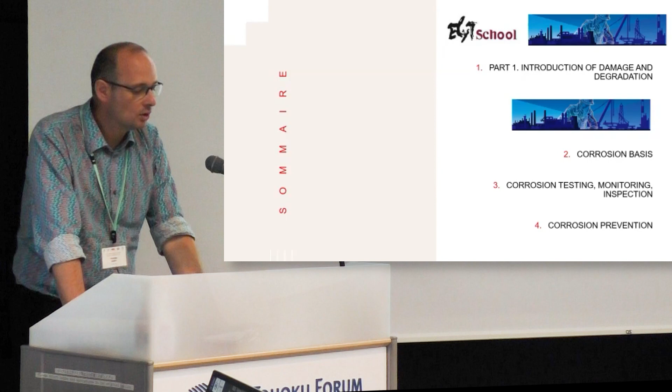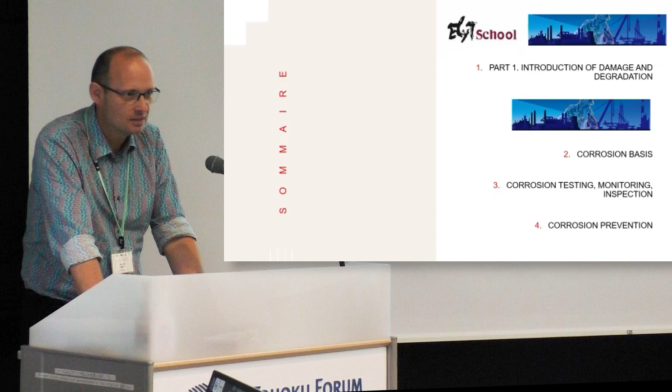My talk is divided into three parts, subdivided into four actually. I'll make a brief introduction of damage and degradation, and since I work mostly in corrosion, we'll talk about corrosion. Maybe some students from INSA Lyon already know about corrosion, so I should ask a lot of questions because I know their teacher very well.

Let's have a look at the introduction of damage and degradations. If I ask you what is corrosion, usually what you're thinking is chains, boats, pipes, garden entrances, and sometimes reinforced bars in concrete. Often when you talk about corrosion with friends who are not specialist scientists, they have the solution: you can paint, and that's it.

So corrosion is not only painting when you see rust. It is also understanding how it will degrade, trying to solve the degradation, and trying to mitigate the degradation. That's the goal of the other talks I will give during this intensive course.

Just to note, the last picture was taken two days before in Matsushima. You see guys taking a picture of boats, and I'm always looking for corrosion pieces.

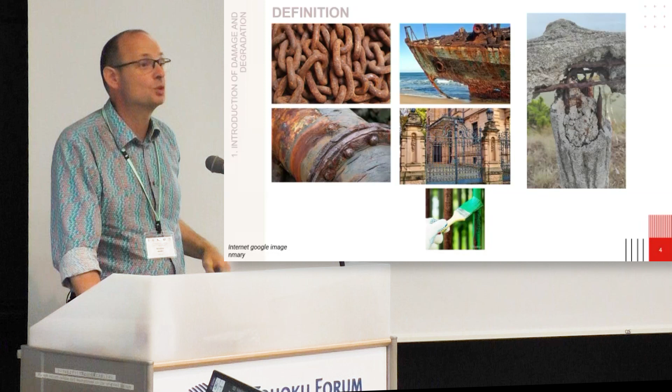Just before, Professor Uchimoto asked you what is risk management, what is risk, and what is safety. I could do exactly the same, asking what is corrosion. If you look at corrosion, you will find a lot of definitions, some from standards, others proposed by guys. But if you read carefully, you will find common words.

The first one is related to damage. It can be deterioration, degradation, destruction, attack. So you are losing matter.

The second word you will always find is environment. That means the material itself is safe, but against environment it will change. And the second point is: if you have the material and the environment, but they are not connected together, you will have nothing. So you need interaction.

So usually what we call corrosion is the definition given here: it is basically the result of interaction between materials and their environment. Consequently, what you get is material loss. It can be loss of properties - mechanical, physical, chemical. And all this loss of properties will finally lead to failure.

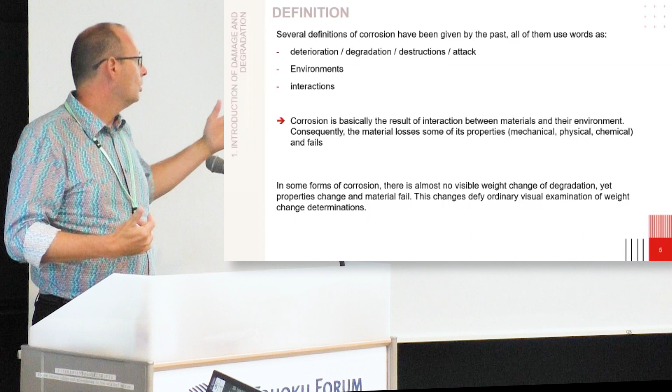Hydrogen. Hydrogen is a small atom. It will diffuse, but it will change a lot the mechanical properties of the material without changing the general shape. So in this case, only by visualization of the piece, you will not be able to see that there is rust and think we should paint. No - we have to find new technologies to detect these degradations, or this effect of environmental action on the material.

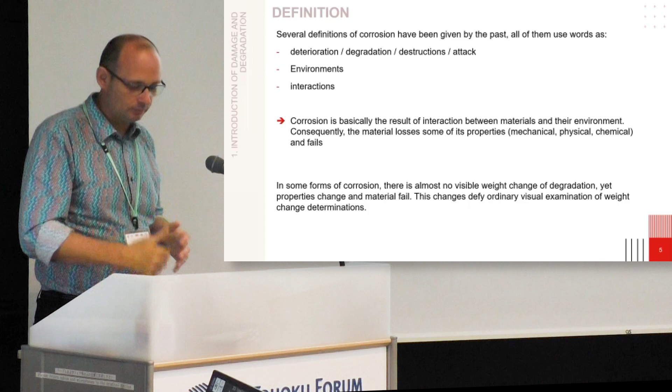Corrosion is also a natural process. It's a kind of cycle of life of your material. So in industry, you start by extracting oxides and ores from the earth.

From this mining, you apply metallurgical processing, so you create metals. From metals, you create infrastructures - this can be a plane, it can be whatever you want. But if you think about the thermodynamical cycle, oxides and ores were stable, so the energy was minimal.

By extracting and shaping the materials, you change the energy. So what does the system want to do? Minimize its energy again. One way is corrosion - there are other ways, but for now I'll focus my talk on corrosion. So you minimize your energy through degradation, and what you get when you corrode materials is oxides, and the cycle is closed.

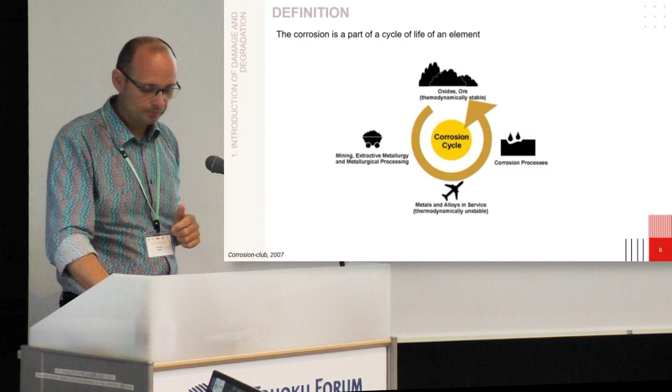So now, when we look at corrosion issues, we have three questions to ask and try to solve. The first one is: we said that corrosion is caused by an environment. All environments are corrosive, but not all at the same degree.

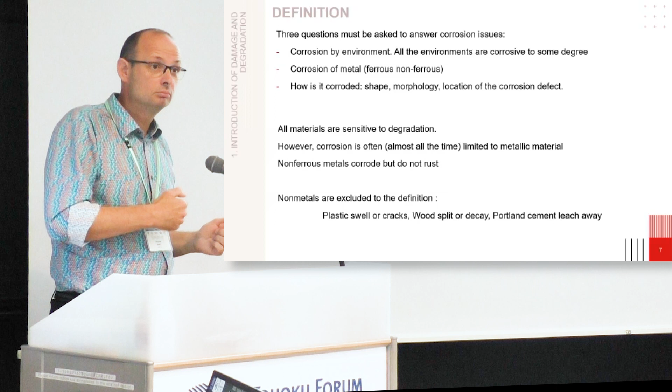Going to find an example. Salt in seawater is more degradative than water with a small quantity of salt, for example in a lake, compared to an ocean.

The point is, if I'm looking at corrosion, I will look at metals. There are a lot of papers dealing with other materials saying they are submitted to corrosion, submitted to degradation. But corrosion is mostly applied for metals. They can be ferrous or non-ferrous materials. If you think about the periodic table of elements, this is block D.

And the third question is, okay, it's corroding, but how is it corroding? What is the shape of the corrosion? What is the morphology of the corrosion? What is the location of the corrosion? When you start to answer these questions, you start to describe the process of corrosion, and you start to understand how your material interacts with the environment.

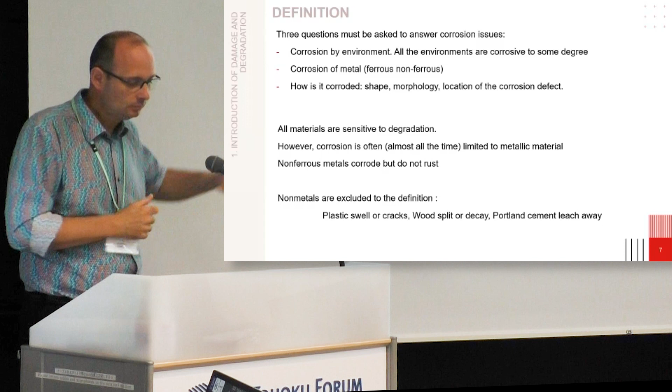So all materials are sensitive to degradation, as I was saying. For example, non-ferrous materials are corroding, but they are not rusting. Rust is only limited to iron. Usually we say that plastics are corroding. No, they are swelling, they crack. Wood splits or decays. Portland cement leaches away. So there is a kind of tricky, small definition that may differ for each material.

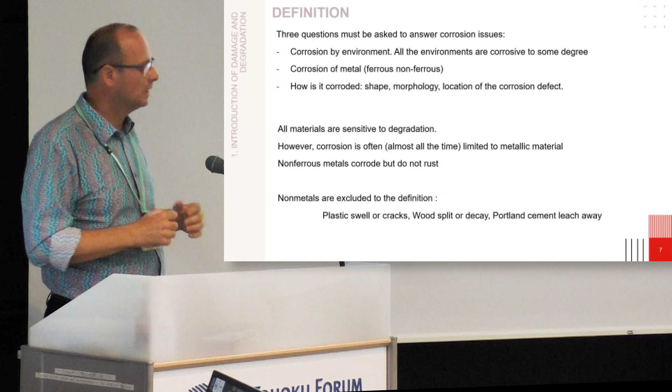Consequence of corrosion. So there is corrosion everywhere. The intensity of corrosion can depend on the environment. What we can see: first point is when you detect corrosion in a plant, you will have a shutdown of the plant. So your industry will have some troubles, your customers too.

Corrosion can lead to leaking from a container, storage place, or tank. So in this case you will have a loss of product, and you can introduce a more severe accident. This is a consequence of leakage. I may discuss that a little bit more.

Because of corrosion, you will have a loss of efficiency. So for example, if you have a heat exchanger and corrosion starts, you will get a clogging of your heat exchanger. So the exchange, the thermodynamic equation of exchange, the heat exchange will change, and you will have a loss of efficiency.

You can also get contamination. So corrosion starts in a piping system, and for example in pharmaceutical applications, you can get some pollution and lose your production. And there is also sometimes, regarding nuclear transportation, radioactive corrosion products that you have to contain for a certain time.

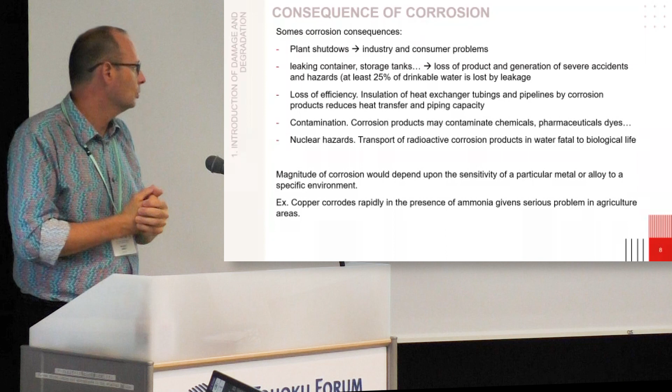So for example, copper is well known for water pipes. In most houses we have copper pipes. Unfortunately, if you use that with ammonia—they tried to use it 20, 30, 50 years ago because it can be used for ammonia storage and transportation—actually, ammonia degrades copper very fast.

So the consequences of corrosion will determine the priority of maintenance activities and how you have to improve your infrastructure. Usually we divide the failure consequences due to corrosion into four categories. The first one is operational consequence: the question is, does the failure have any direct adverse effect on the operational capability?

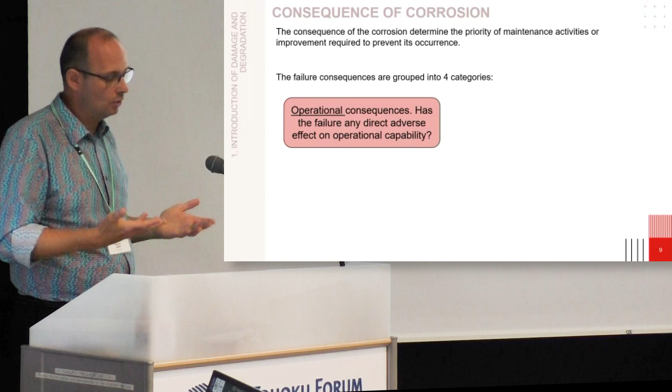The second is safety. Does the corroded piece cause an immediate loss of function or secondary damage? Secondary damage is, for example, you have a pipe, there is a hole starting and water starts to fall, and there is some electrical installation below. You can imagine that you have a secondary damage.

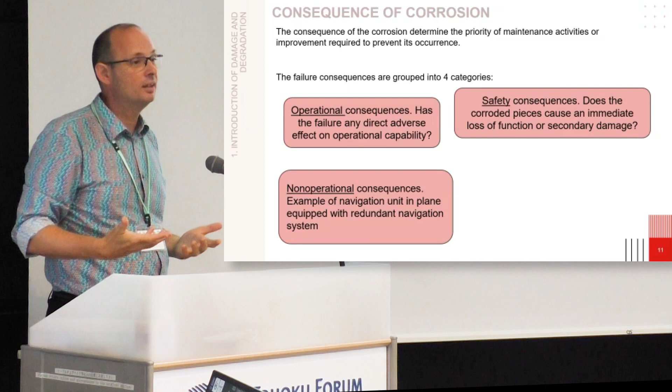Non-operational consequences, so this is another kind of example. For example, in a navigation unit, an element starts to corrode, but you know that in an airplane everything is doubled. So there is a consequence of corrosion: one unit is unusable, but hopefully you have a second unit that can still work.

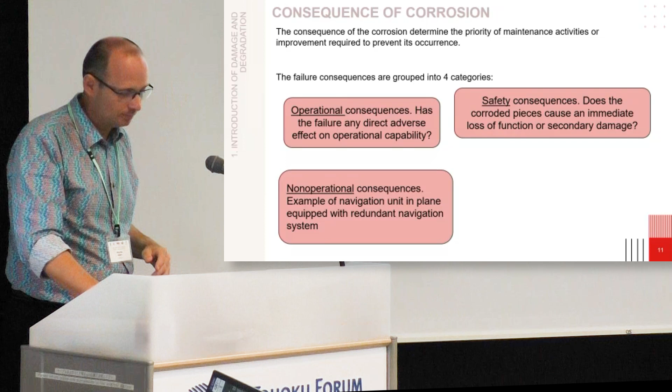And the hidden failure - this is the way that you increase the risk. The risk is not immediate, but you will just start to increase risk until a certain moment, or you will have a loss of properties, for example, for your material.

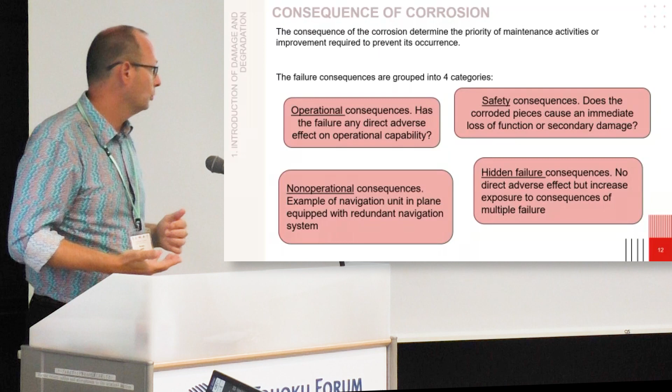So when we say that, it looks like corrosion is very important. Actually, it is, because if we look at the gross domestic product, on average, in all countries that have completed a survey from NACE, which is a national agency in the US for corrosion, they made some calculations and realized that corrosion is 4 to 5% of the GDP of a country.

There are some specific areas where corrosion is quite important, and if we list some of them, randomly chosen: for example, in gas and oil transmission pipes, you will find a strong corrosion cost. If you look in Arabian Gulf countries, you will see that for automotive, the lifetime is quite small, only 6 months before observing the appearance of corrosion.

You will also have the same in concrete. Almost 95% of concrete is submitted to corrosion, and 10% of aircraft maintenance in the US is here for corrosion remediation.

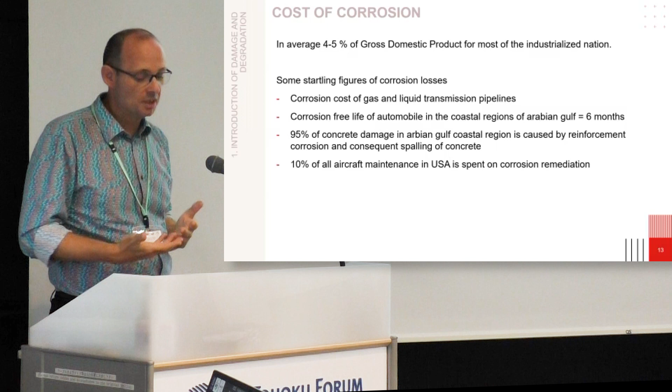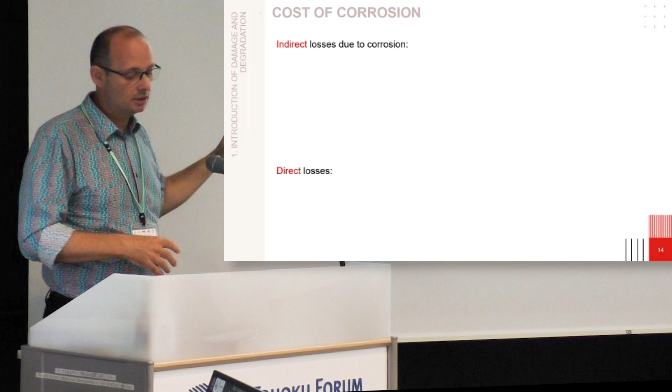So the cost of corrosion, usually when you look at companies, is divided into two parts: what we call indirect losses and direct losses. What are the indirect losses due to corrosion? A loss of efficiency, a loss of production, over-design, shutdown, and product contamination.

So what is over-design? Over-design is the fact that because you want to avoid corrosion, you will scale your unit larger. That means you will pay more for your materials to produce.

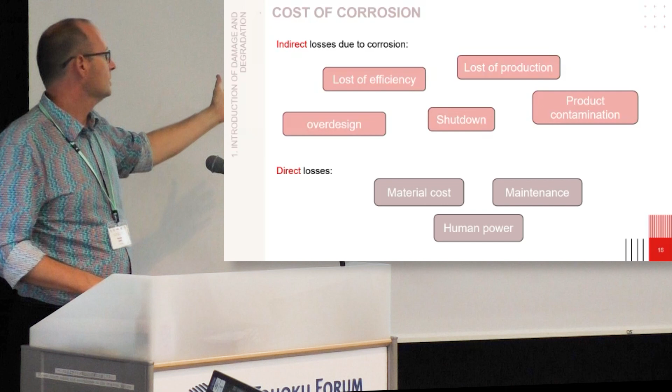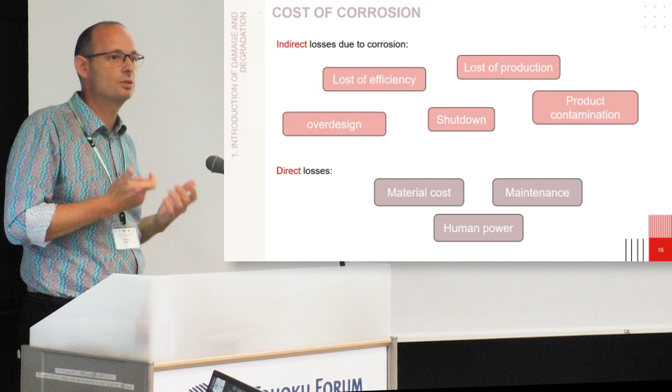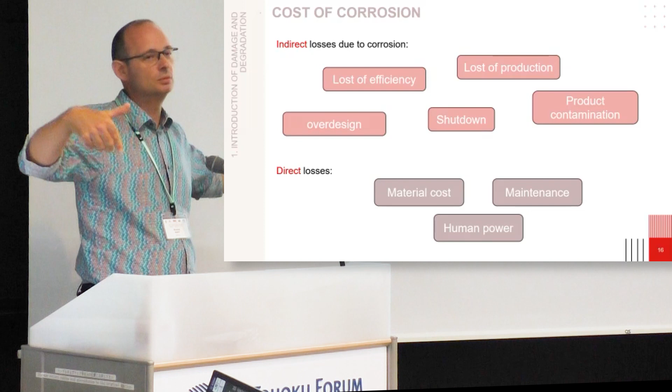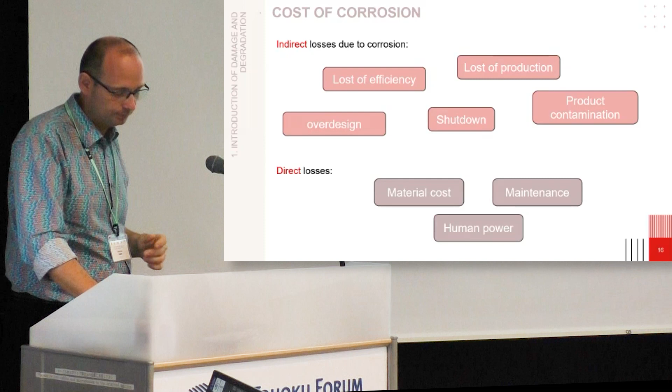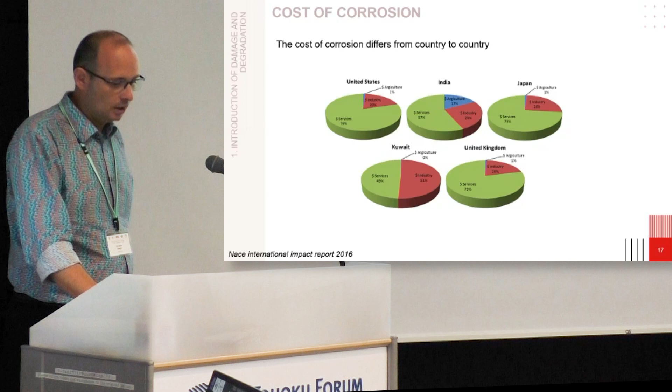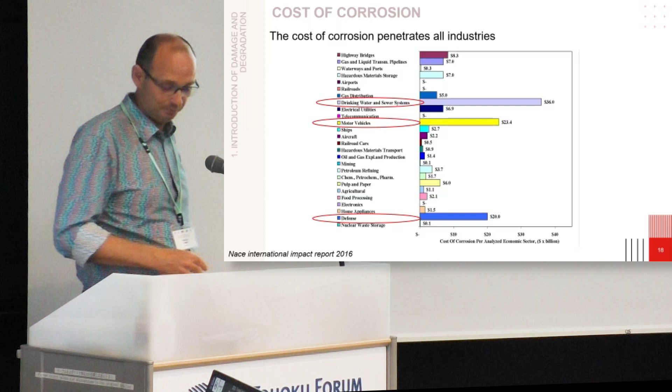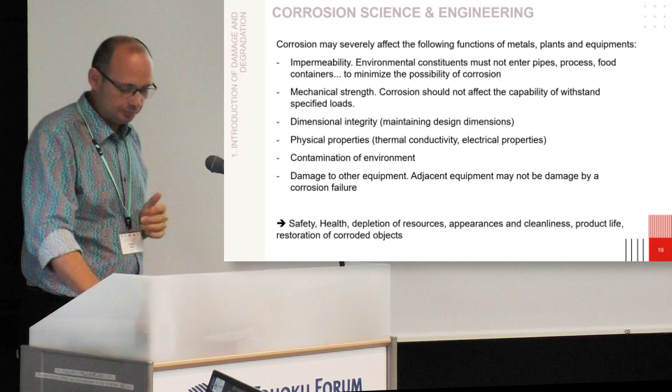Okay, so now, who is studying corrosion? That's a good question.

The first ones are the scientists. Why do they want to study corrosion? If you go to a do-it-yourself shop, you will find painting and that's it. No, it's because we want to improve the understanding of the cause of corrosion.

We want also to find ways to prevent or minimize damage caused by corrosion. This is very important because today we have to take care of the materials and structures that we already built. So we have to maintain our actual structures, and to do that, we have to prevent them from corrosion.

What are corrosion engineers doing? They try to apply knowledge to control corrosion. Here's a small example for a piping system. In pipes, there's a well-known technique, I would say cheap: cathodic protection. It's quite easy to understand - you just apply a potential to your pipe and you protect it. That's what the corrosion engineer will apply.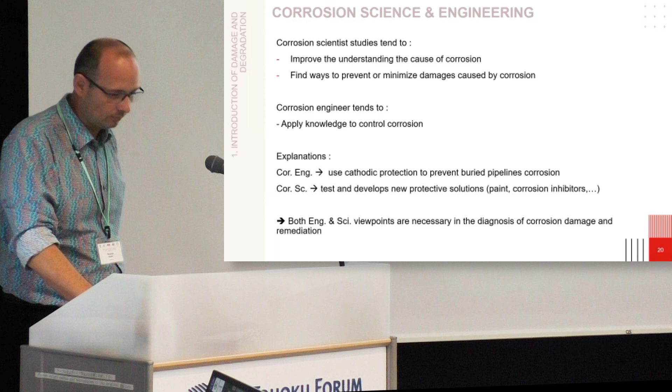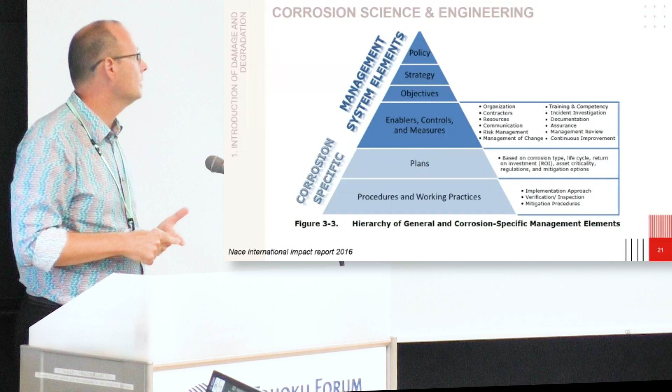So we have to look for procedures to evaluate the risk - that means inspection. There are a lot of questions about inspection: I should know which kind of risk of corrosion I have, so I can select the best inspection method to evaluate any damage. That means I have to select an inspection method and figure out where I can implement this inspection method. That's also another question - in a pipe, should I put this in the line part or in the elbow part?

And of course, how can I mitigate the problem of corrosion? When I have that, I can make some plans, because I have an idea about the corrosion type, life cycle of the material, and so on. So it's like making a plan of maintenance or plan of inspection.

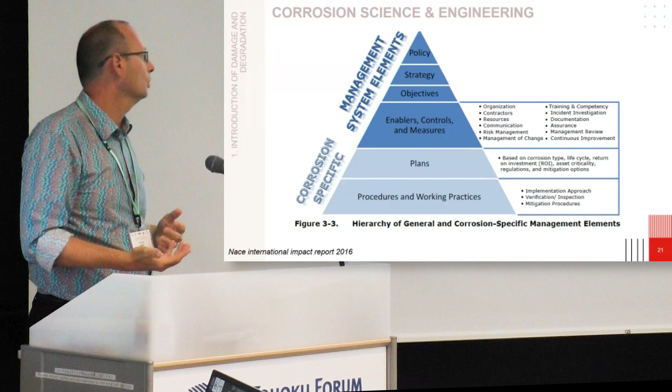One point is usually materials are designed by persons from the mechanics part. Mechanics is equations - they are not taking into account environment. And we said that environment is important. So nowadays, most mechanical engineers know about degradation, as corrosion. That means they have to think when they design a structure, the process, and build the equipment - they have to think about what kind of corrosion, what kind of degradation, not only mechanical but chemical also, will appear.

So either they design it or they buy it from another company, you operate, and from the operation it's okay - what kind of strategy for maintenance, when should I update the materials. That means I know that regularly I will need to stop my business unit and replace some pieces. And also, what can I do with the failed parts? If you're working in a pharmaceutical environment, that means your pipe has been polluted by chemicals - can I release it or not? And so on.

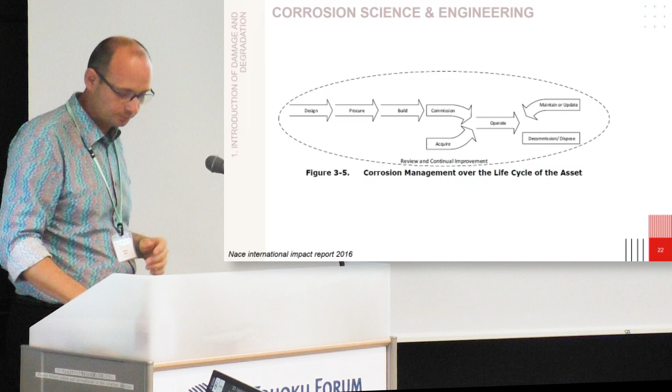Taking this into account is very important, because you have to find a compromise between trying to get to zero risk - and we know that doesn't exist, but trying to reach this goal will cost a lot, indirect cost but also direct cost. Another solution could be: I don't care, let's see what happens.

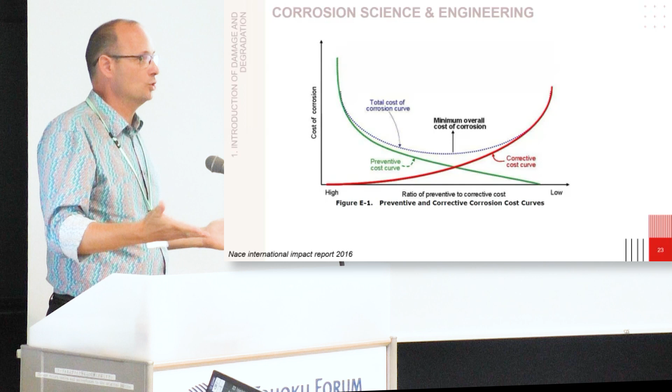Actually, this is a financial manager that you have to convince. He has to put money on effort to prevent degradation, which for him is a cost, a direct cost, which he wants to avoid.

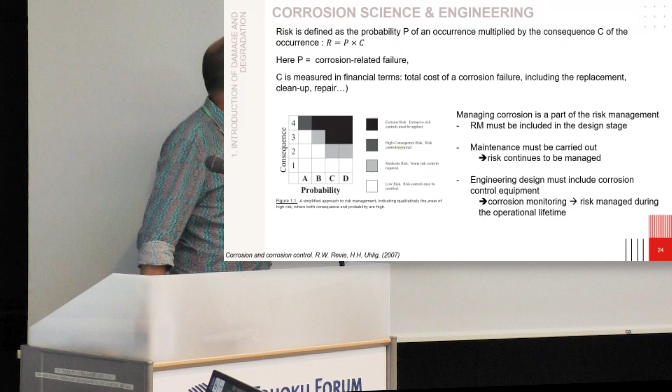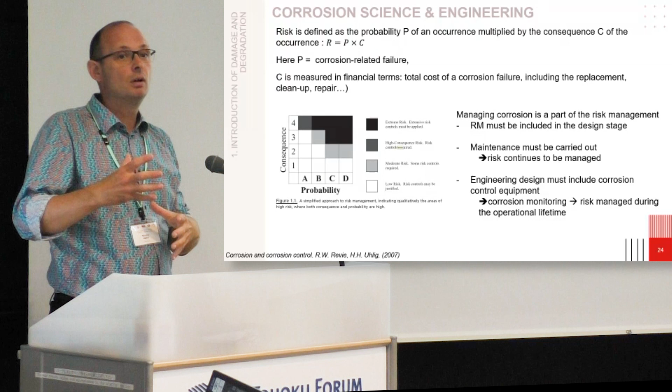This also means you need to fully understand what your infrastructure is, and what are the consequences of loss of properties on your infrastructure.

I'm still on time? I don't know. How many time? Okay. Thank you. Okay.

The first one is material resource consumption. We have a shortage of some materials, rare materials for example, that are used to produce alloys, stainless steel, chromium, molybdenum, nickel. We know that resources are not infinite, so that means the products we have made, we need to save them over time - we have to avoid corrosion.

The good point is even corrosion has started from centuries ago, we don't know all the corrosion history for materials, so we have an incomplete knowledge of that. So we need to update our knowledge.

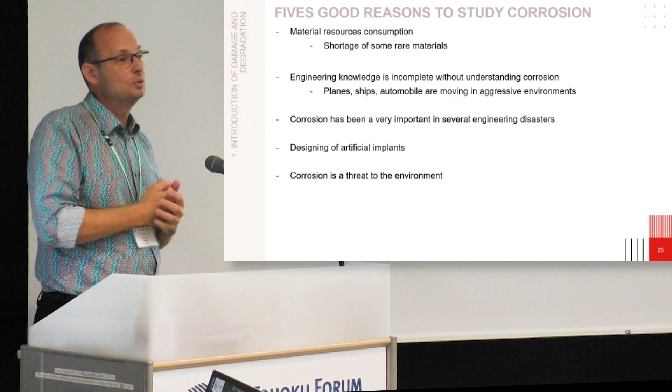As shown by Yoshimoto Sensei on this first slide, there is important and very severe disaster due to corrosion. Okay, it's a good occasion to...

One very important point now is, okay, so we need hip replacements. We have a lot of surgery, so we need to design materials that can fit with the human body. And in the human body, there is also corrosion. And also corrosion is a threat to the environment.

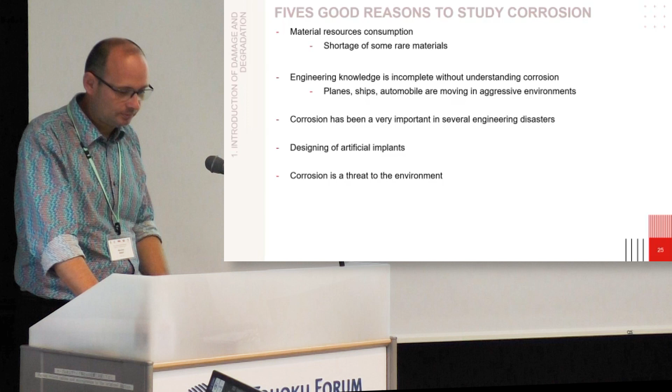So better corrosion management - if I want to correctly manage infrastructure, I need to know the cost of corrosion, the potential saving, what I can do for corrosion, when I can promote corrosion management in policies. That's important actually. This one is quite tricky, so that's why we are trying to teach a bit about corrosion.

As it is a degradation at the end of the use, not at the beginning when we design, we need to also educate and train staff about corrosion. And of course, we need to develop advanced corrosion control technologies.

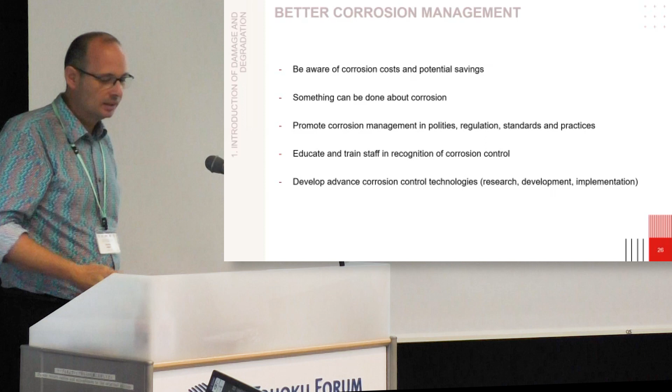So that was quite general, but now let's have a look at what corrosion is at the end. In corrosion, there are let's say 3 environments: high temperature environments, atmospheric environment, and aqueous environment. The difference is: high temperature environment usually means the environment is a gas, and there's always a question about the limit of temperature, but a couple hundred degrees - okay, and there's a specific mechanism of degradation.

I will give some information about that in another talk. Atmospheric environment is the one we are facing each day - it's because you have evolution of humidity, evolution of temperature, evolution of pressure, evolution of pollution. Okay, this is the atmospheric.

The third one is aqueous. So aqueous is quite easy - it is in water, that's the electrolyte, this is the solution. And if you look at corrosion in water...

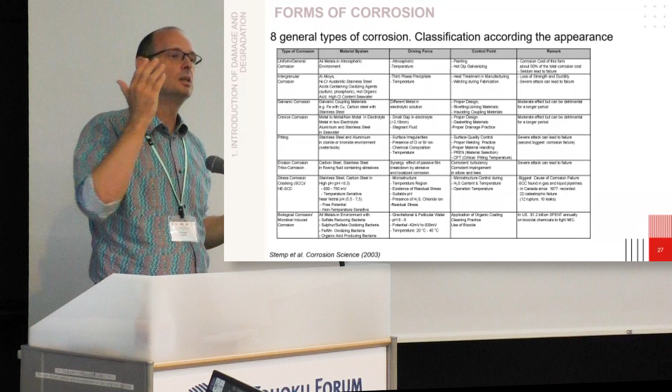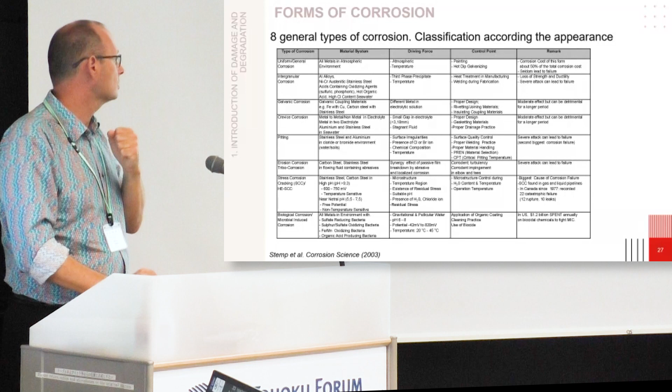If we look at this, there is some corrosion that comes from the material itself, and some because the material is not only alone, as crevice corrosion or galvanic corrosion, but is also influenced by the environment. Erosion corrosion means the material is submitted to a flow of water or particles. Stress corrosion cracking means we are applying a mechanical stress on the material, and it's not only in a friendly environment. And biological corrosion, this is mostly for the human body, but not only.

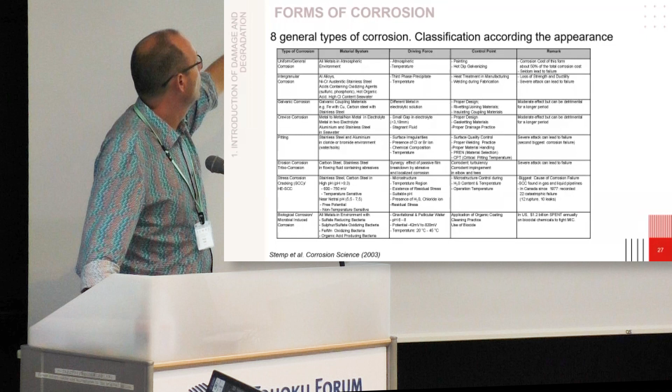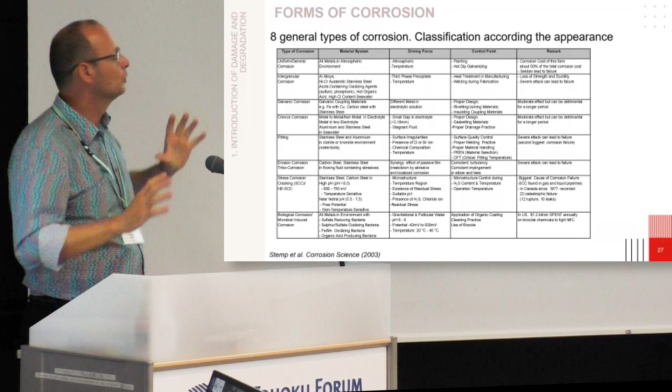Usually we can find and summarize the kind of material systems that are submitted to these types of corrosion. There is some driving force, what we have to control, and some remarks. I will detail this table a little bit after. This is just to give some examples, just to give you an idea of what kind of corrosion we find the most.

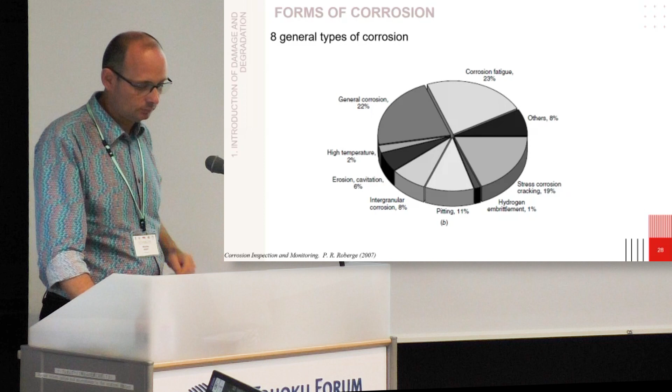If I try to summarize a little bit the driving force: corrosion is driven by thermodynamics. In thermodynamics, what we have as a parameter is temperature - that's one. Corrosion is also driven by potential. The potential is also a thermodynamical quantity. The potential can be tuned using ions in solution - anions like chloride, for example, for salt in water, or pH.

And there is also another parameter, which is gas. I'm pretty sure you will remember your thermodynamics class from first or second year, for those who have done engineering school. That's for the environment, so you can look rapidly everywhere - you will find at least one of these parameters that has a stronger effect than the others.

Regarding the material, if we look at it, we always have the same microstructure heterogeneities. Until now, it costs a lot to create a monocrystal of materials. It should be interesting for mechanical properties - I don't know, I don't come from mechanics - but from the corrosion viewpoint, yes, it will be. If I have a monocrystal without any defect, it starts to be very good. So that means the microstructure itself of the material will act on its degradation regarding corrosion.

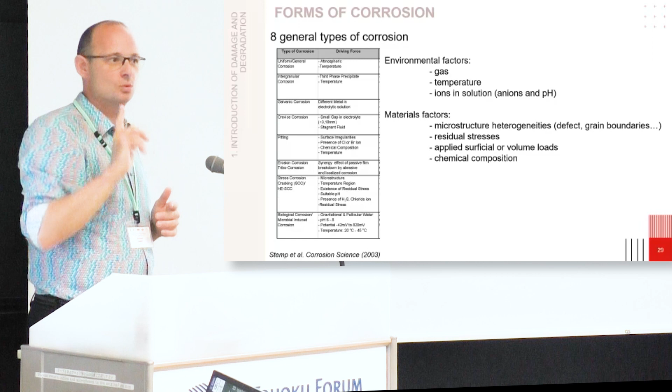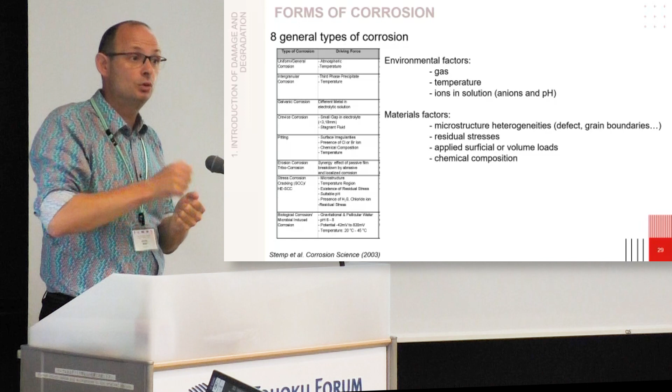So because they paid less, they got lower quality scissors, and they corroded directly after the first bath. The end of the story was they rejected the contract with the provider and turned back to the previous one, who had a lower quantity of sulfur and better resistance to corrosion when cleaned. The price difference was because with less sulfur it's more difficult to machine, so it takes more time and costs more.

Okay, this is a kind of example of chemical composition.

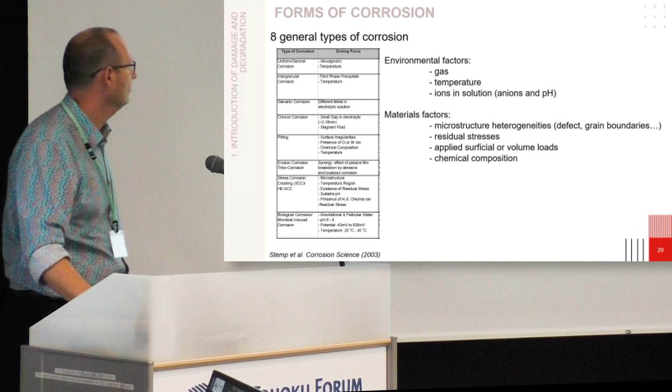Now, how can I recognize corrosion? I like this small drawing because it's quite visual to show what happened, and I'll give some pictures right after. Usually, for more than eight corrosion types, we use groups. The first is Group 1, identifiable by visual inspection. It costs almost nothing — you just train people, they go to the infrastructure, and they watch.

What do they watch for? Uniform corrosion — you have a drawing here and you can see a depth created. Pitting, which is a local dissolution of the material; sometimes not so easy to observe, but you can. Crevice corrosion — I'll give more detail, but it's clearly when you put pieces together and the material dissolves underneath them. Or galvanic corrosion, a funny type I'll show you, where one material is protected and the other one dissolves.

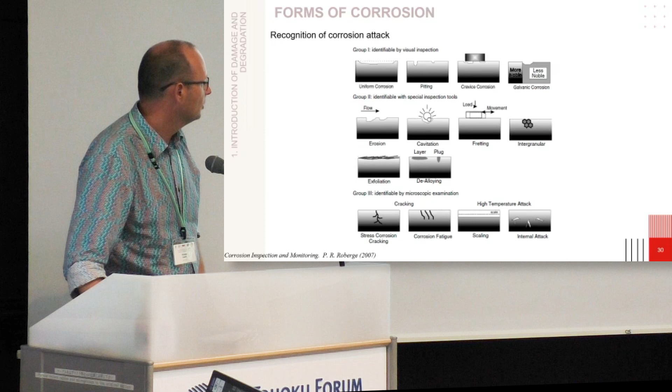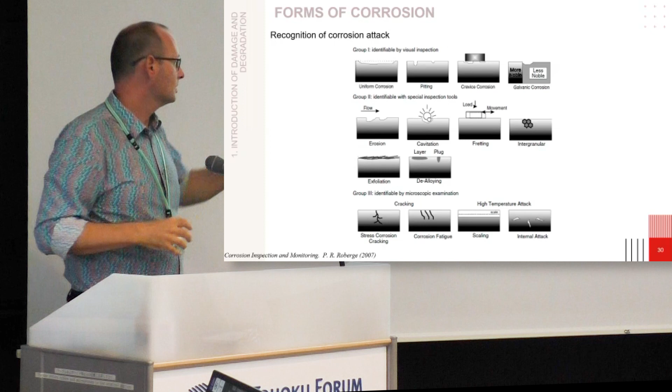I forget the name in English, but this is quite important in the case of materials sensitive to hydrogen embrittlement. Hydrogen diffuses and forms pockets inside the material. As it's a gas, the structure starts to expand and you create gas volume inside the material.

Some detail about corrosion — a beautiful picture of general corrosion.

What we can see is a uniform attack, mostly at the large scale. Some pieces of the boat are still remaining, but they will be removed.

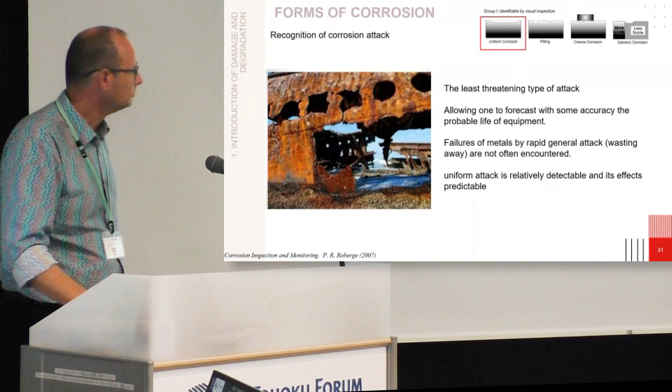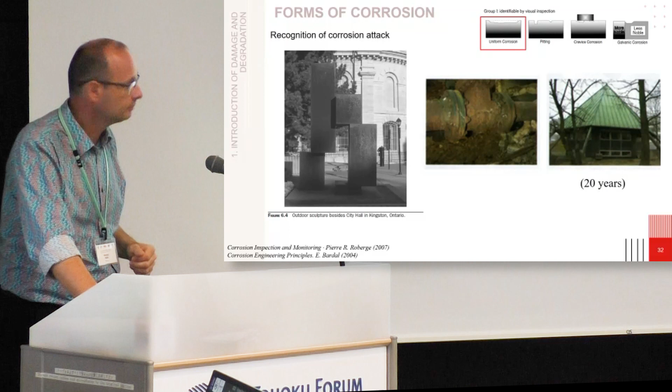So I should not enlarge the picture.

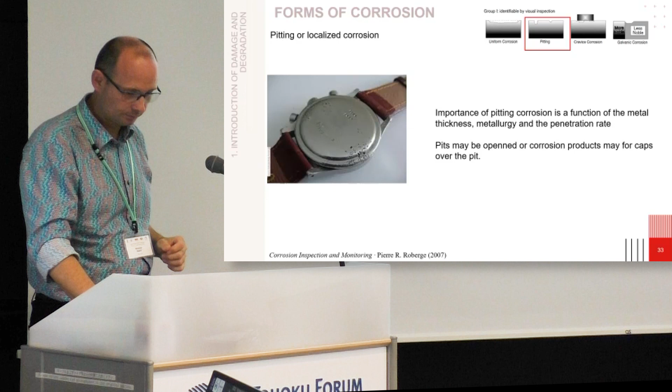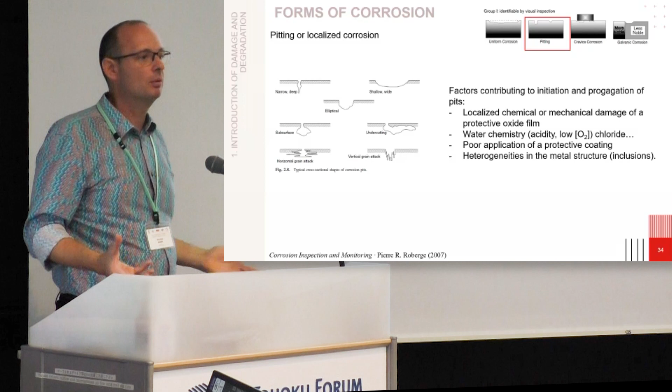What's interesting is that pits can change their morphology. There is a variety of design of pits. Here you have a typical cross-section taken from a literature book. Pits can be narrow and deep, shallow and wide, and you see a lot of design. This design will depend on a lot of parameters: environmental, microstructure, evolution of the chemistry.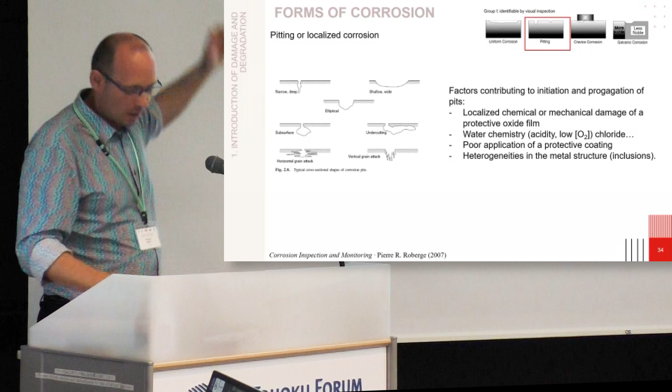Two minutes, wow, okay. So I will go fast because after this it's only a demonstration. And here it's to show you that it can be quite difficult.

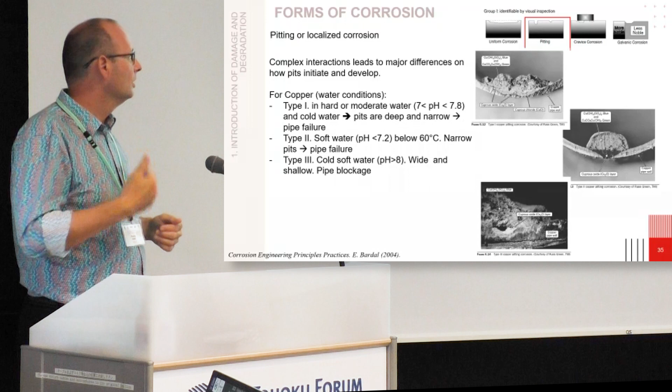We still, with pits for example, try to develop some models to understand. I told you, we are scientists. We want to know, so we keep going to understand what happened.

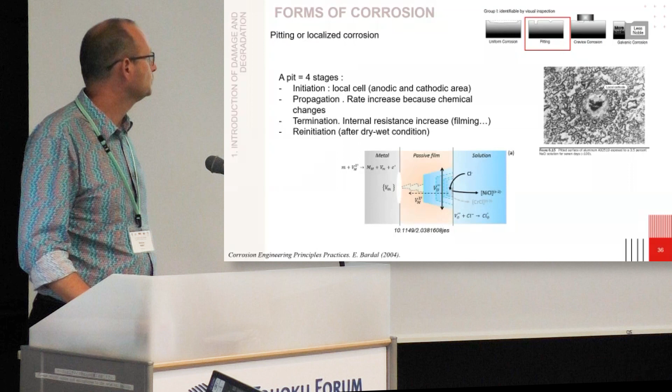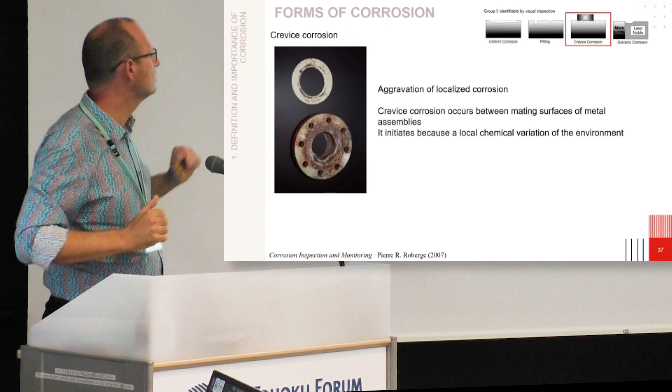Another kind is crevice corrosion. It's because there is some water going between two pieces, which changes the environment. There are some very specific models here. So you see at the beginning almost nothing, but with the electroneutrality of the solution, you start to have ion diffusion, the ion concentration changes, and you change the environment. The material is not safe anymore, and dissolution happens.

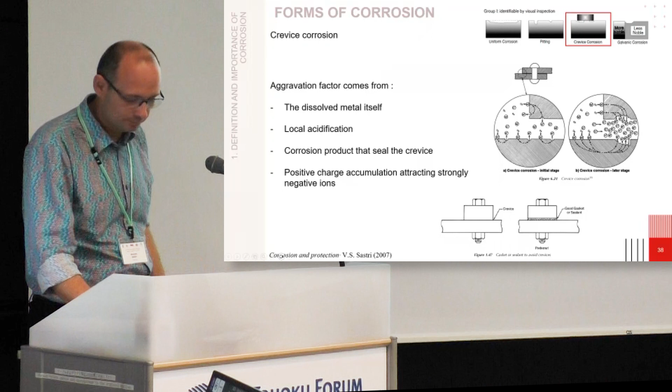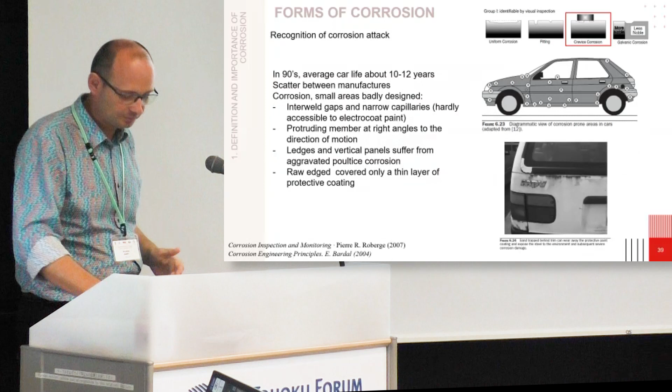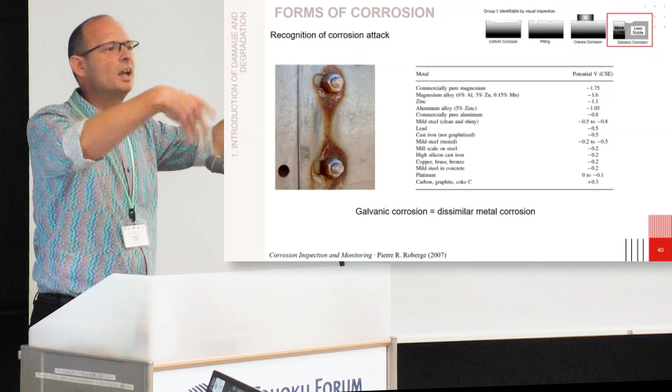And I think I will stop right there. This is the typical corrosion we can find when designers are not aware about corrosion, because they select two materials - it's easier to make an infrastructure, so they will take two materials. The problem is the two materials have significantly different potential energies, meaning one will be protected while the other one dissolves. This is typically the case when you try to make soldering with copper and steel wire, for example. In this case, the steel wire will dissolve very fast.

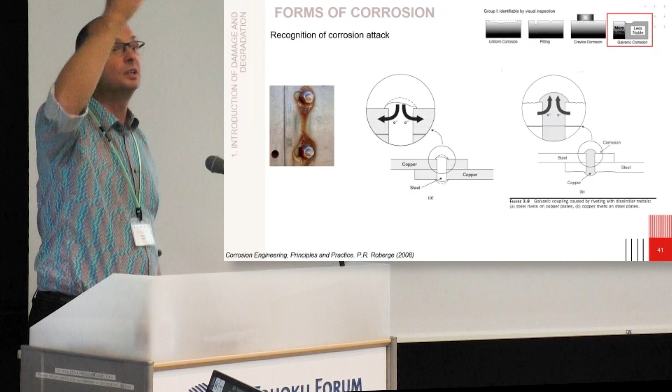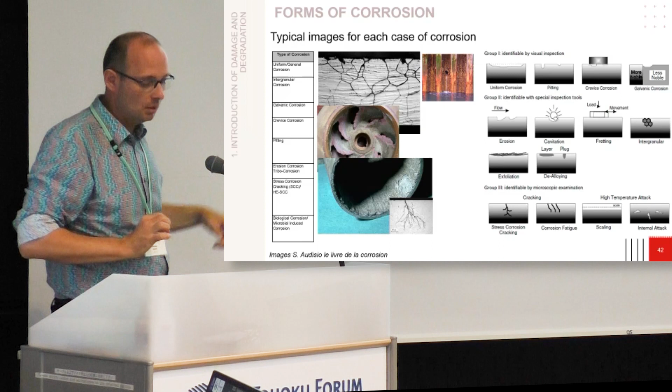Okay, and at the end, for each case, you will find a typical image. Here it's for intergranular corrosion, you can see the grains of the material. Here it's erosion for blades in a piping system. Here it's stress corrosion cracking, a kind of cracks, a tree of cracks going into the material. So you can see the last one: from outside inspection and visualization, you will see nothing. But if you correctly select the inspection method - and you can see the size is small, so it's quite tricky to select this method - you will be able to see this. I love this picture. Thank you for your attention.